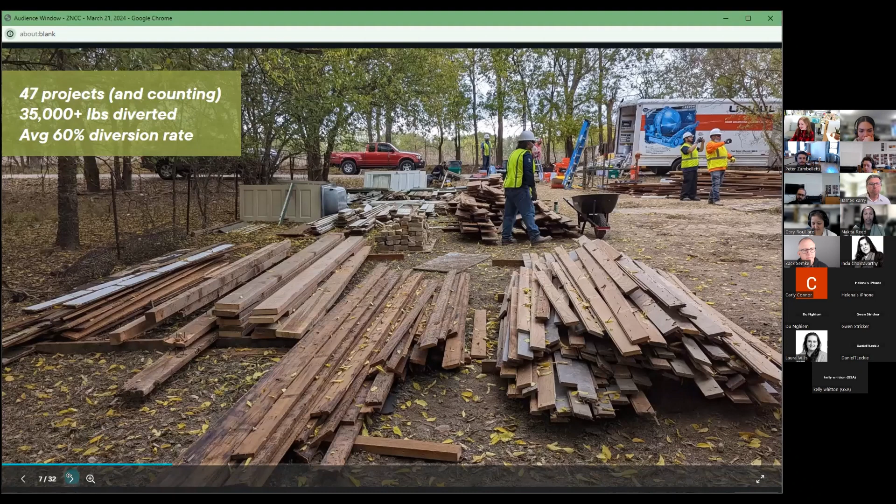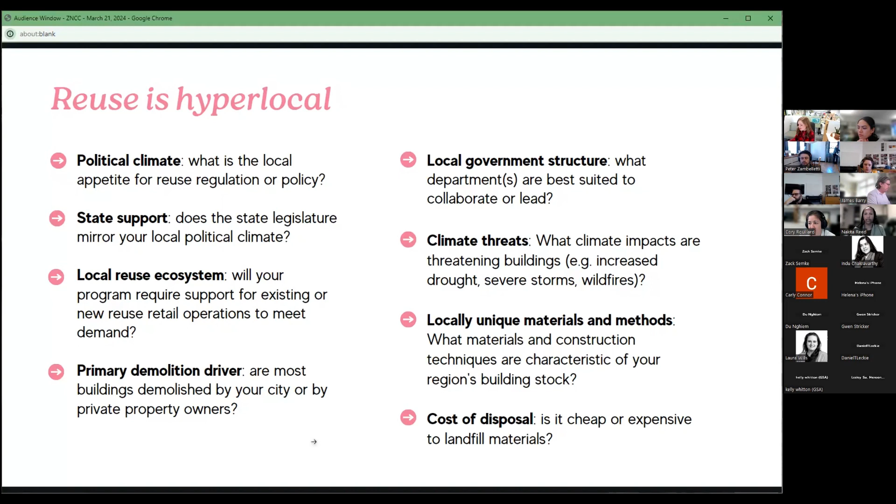So that comes into play when we're talking about how policies are crafted, because that identifies what kind of stakeholders need to be in the room when you're talking about how to move deconstruction forward. So hyperlocal is definitely key. And then we've kind of reflected on how we've gotten to the point of an actual regulation in a city like San Antonio.

Looking at how materials are flowing in our city, like how people can access reclaimed building materials - so looking at those considerations. And then of course, my favorite thing is developing interdisciplinary networks and partnerships, because for a policy like this to succeed anywhere, it can't just be one entity or one person doing that work, because in effect we are trying to challenge the overarching linear economy in our cities, which makes it really easy to throw things away.

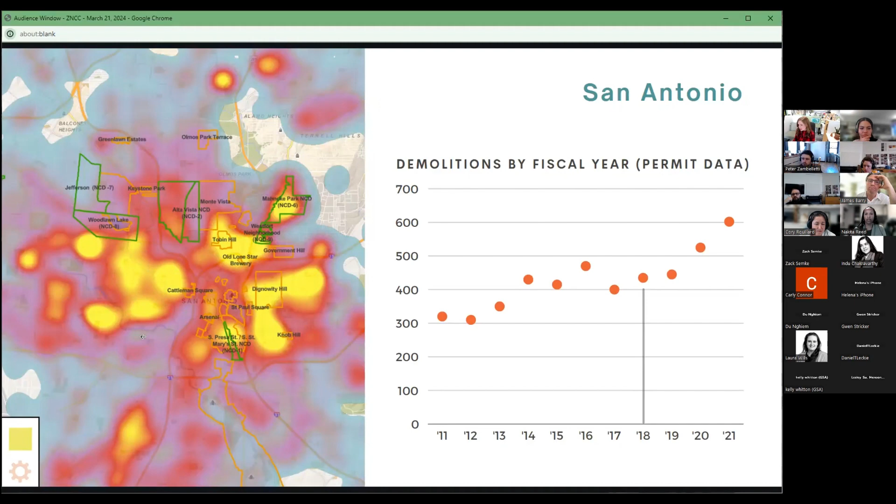Something we did before bringing the ordinance to a vote is we commissioned a study called Treasure in the Walls. It's at this link if anyone's interested in reading it. It looked at what a deconstruction policy would do for San Antonio economically, environmentally, culturally, socially. It was basically a strategic plan for deconstruction. And we wanted to put a dollar value to the amount of materials we were throwing away through this linear practice.

$16 million in the past decade. That's insane. So really getting to those people that are numbers-based and understanding that we're literally throwing away resources that could be used in our own city.

I mentioned how we're up to over 600 buildings demolished annually. Something really key with data is that we were able to illustrate this is a 70% increase since 2012, meaning that pace is exponential, and that we need to do something to curb the reality that we're throwing away things that are filling up our landfills and things that have value.

Something else really key to our city council was the public health implications of demolition. Demolition is effectively air pollution. Even if you're spraying down a site the way you're supposed to with water while smashing it, there's going to be particulate matter that spreads 200, 400, 600 feet away from a site. Demolition doesn't happen in a bubble, but it also percolates into our groundwater. It's just not a sustainable practice. And I look forward to the day when it's something people really look down on.

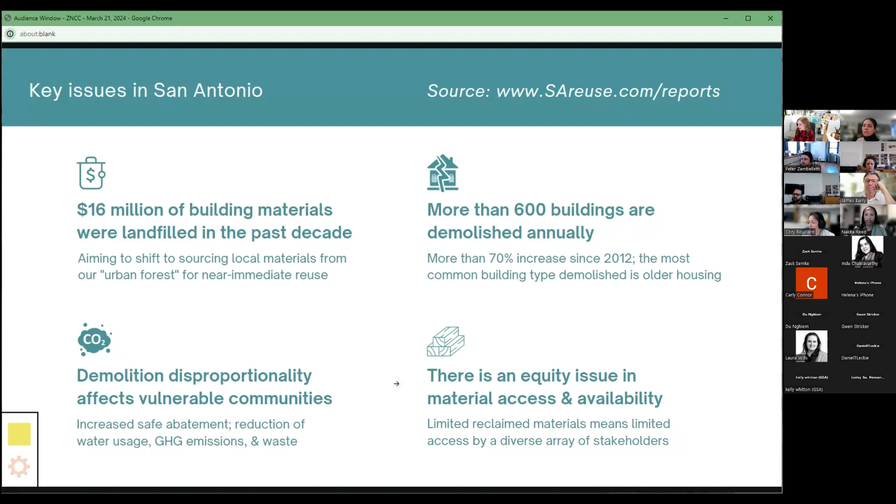Limited reclaimed materials means limited access by a diverse array of stakeholders. In a way, when we're throwing away building materials, we are robbing our own community members from being able to access those. And for what? For them to sit in a landfill and do nothing? Come on, that's crazy. We really wanted to focus on how, if we got more of these materials back into San Antonio, we could use them for a multitude of different purposes that are productive.

Something focused on preservation, we also really wanted to look to history to demonstrate that deconstruction isn't actually new or novel. Demolition is more new. The way that we know and experience demolition really wasn't a widespread thing until after World War II, which is when we brought war machines, machines of destruction, back from Europe to the United States for urban renewal. Before that, deconstruction was more prevalent, sometimes referred to as wrecking.

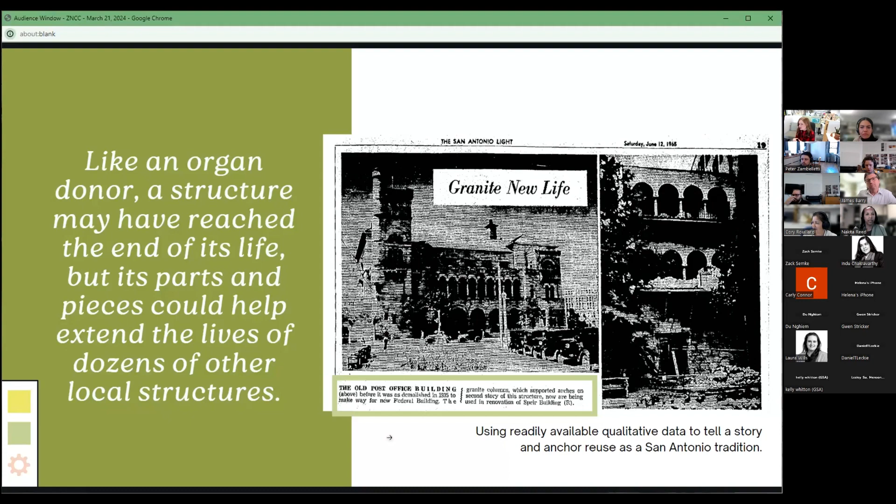And I love newspaper archives, they're my favorite research tool. This is just one example from San Antonio, where one of our older post office buildings, located right across from the Alamo, was deconstructed in the 1930s. Some of the granite columns and limestone block were used to repair a building on the famous San Antonio Riverwalk. So we like to point out that this isn't only a San Antonio tradition, but an American tradition, and it's something we can get back to if we have the will to do it.

Training a workforce, this is key. For any community that is looking to get started or dip their toes into what deconstruction can do, workforce training, I think, is a really great next step.

As the city, our first deconstruction contractor training that we hosted was in 2019. That was a year after we launched our advisory committee, but still years away from our actual ordinance being adopted, so you don't need a policy to pursue workforce training. We've held a training every year since, and as the city, we are committed to hosting it indefinitely.

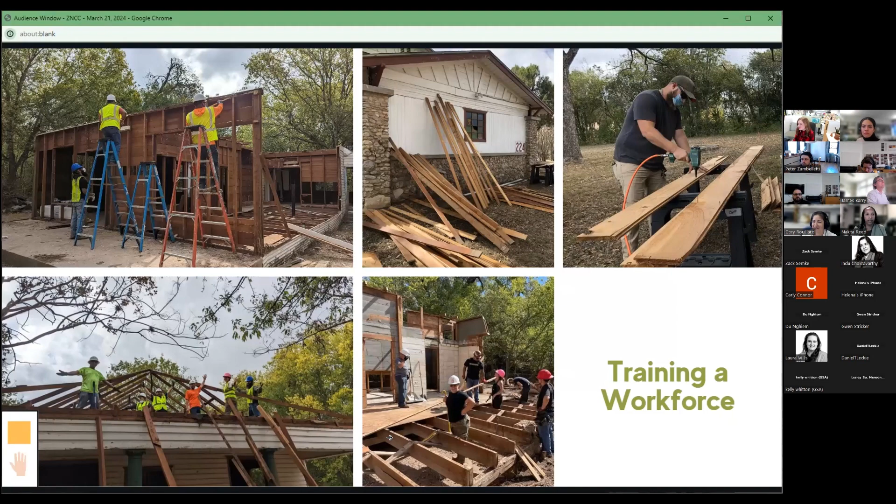We subsidize this training for contractors, and we work with an amazing all-women-led nonprofit out of Re:Purpose Savannah. We hire them to train our local contractors. And I have a fun video to show you that summarizes that program.

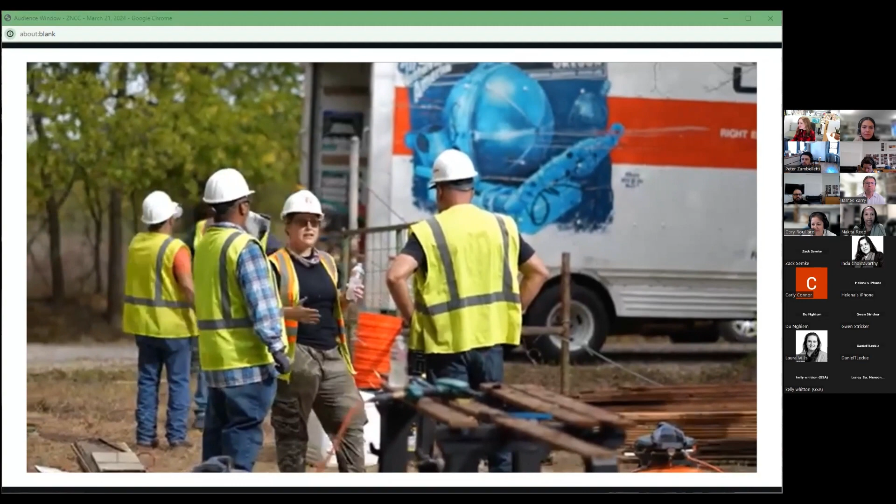We are here on a property on Fitzhugh Road, which is owned by the San Antonio River Authority. We are conducting a deconstruction training program in partnership between the Office of Historic Preservation and the San Antonio River Authority's property here. I think it's an awesome experience.

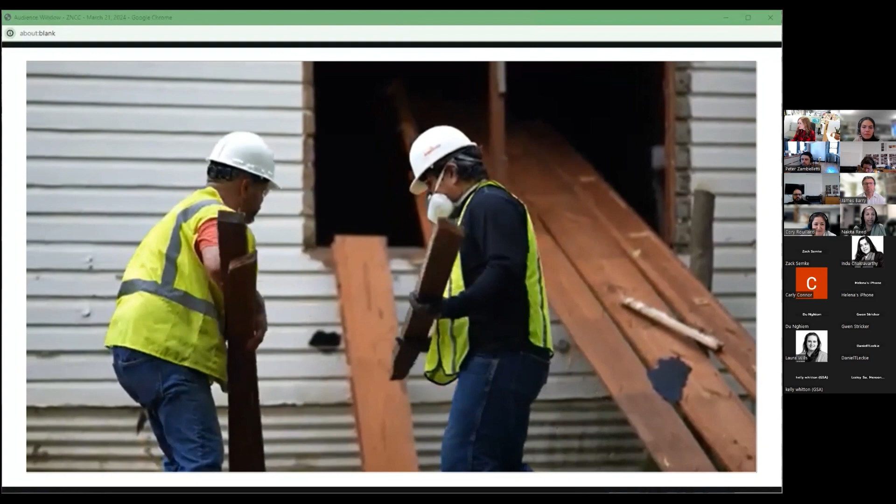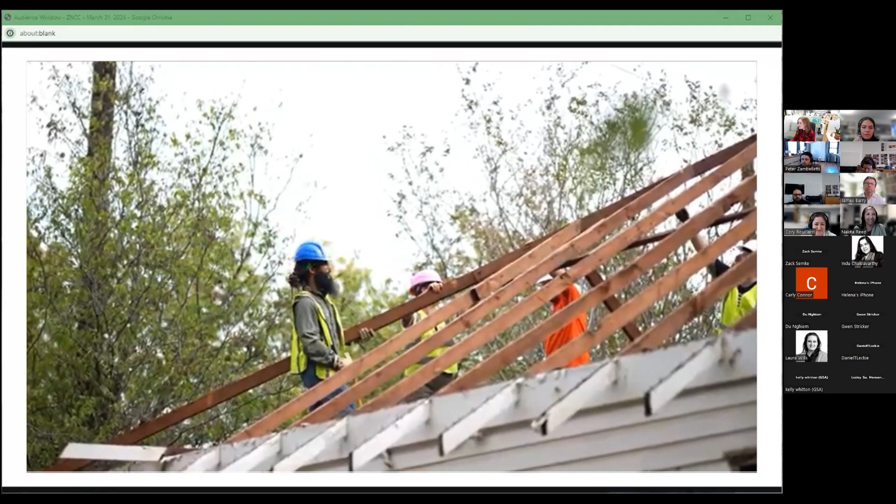I've learned a lot, as far as salvaging wood, it's going to be beneficial to us. The tools, the knowledge that they've been sharing with us, taking us out—I never imagined we could take a roof off from the attic out. When I got up there and started doing it, I was like, wow, okay. It's been a real experience. A lot of knowledge has been poured out, knowledge that we could take back and use for our stores and for anybody else out there that wants to do this kind of stuff.

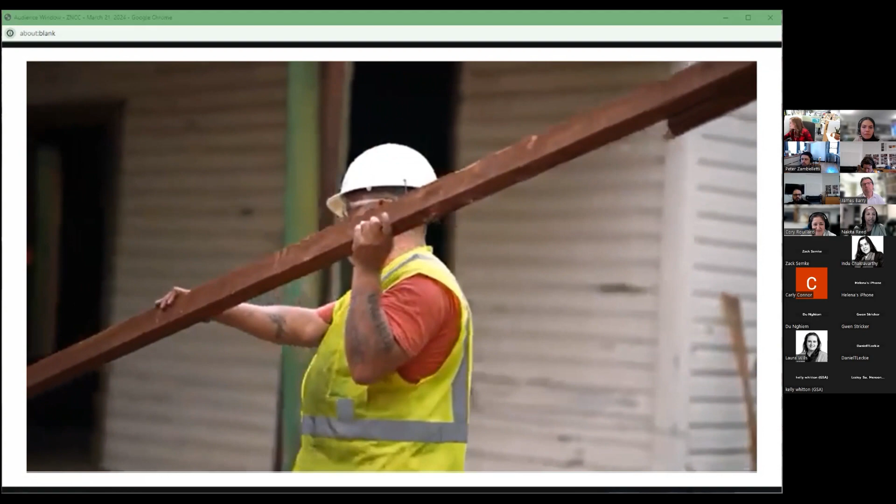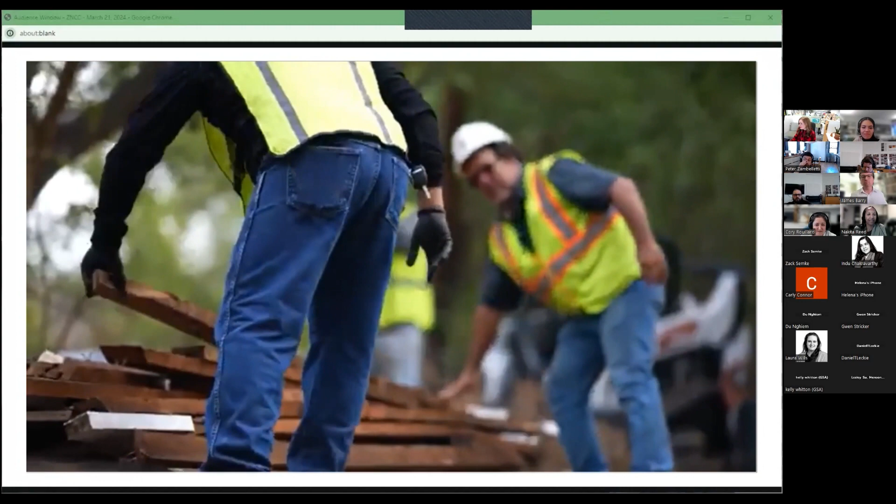I'm new at this, and just working with the material, it almost has a life of its own. Like when you're trying to pull a board off, it's almost like it doesn't want to leave home. But it has to, because otherwise it's going to go in a dumpster. We're also saving the environment by not having to cut down trees and throwing good material in the landfill.

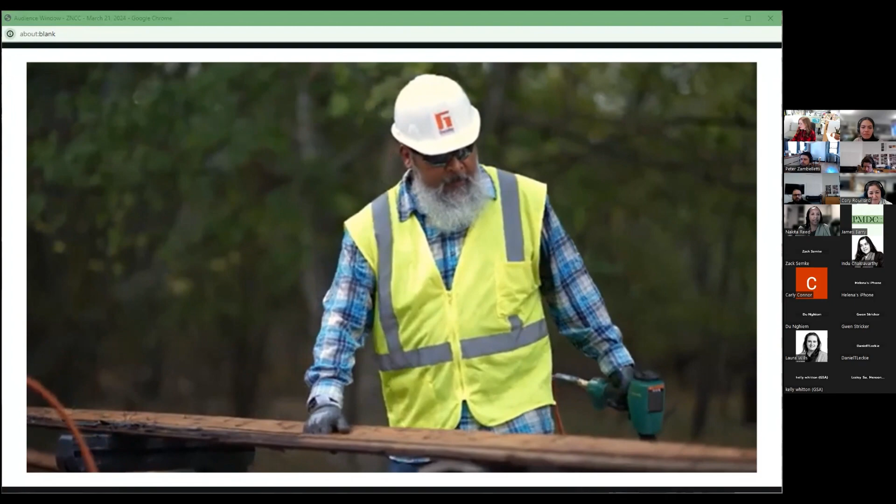What we see is that a portion of our materials is going right back into the buildings, and another portion is going into craft materials and home goods, things which will be cherished, a family table that you'll sit around for generations, heirloom items. These are really beautiful materials, and often they're best served by being accessible, touchable, visible.

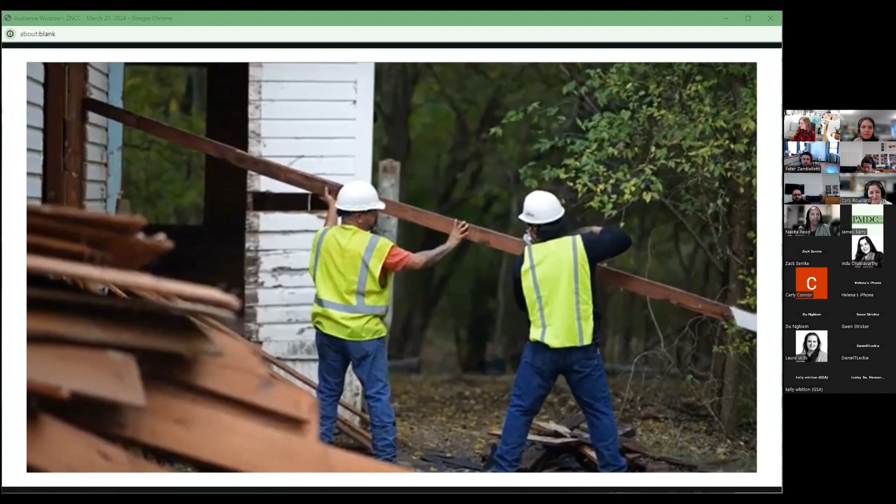For folks who are interested in getting involved, there's a million ways to do so, and you don't have to swing a hammer to get involved in deconstruction. We need people at every level, working in policy, advocacy, education, business. Get in touch with the OHP, your Office of Historic Preservation, which is going to be hosting many trainings just like this one.

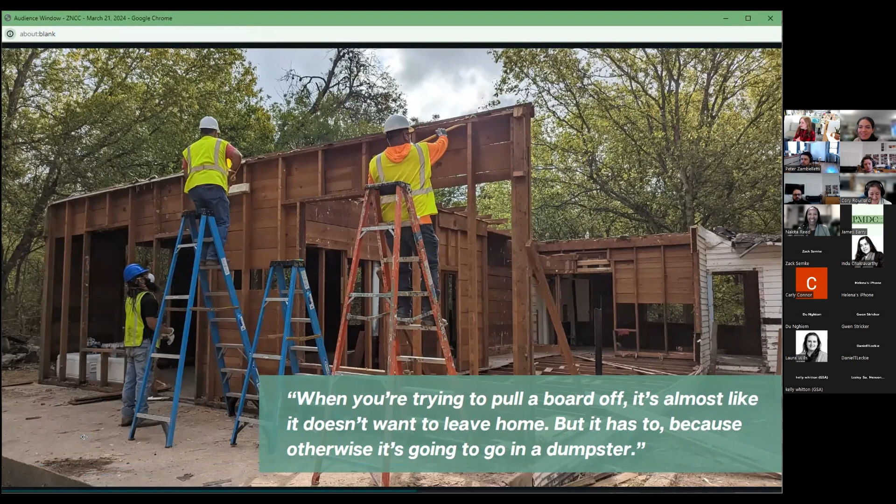I want to hone in on something that a trainee said, which is when you're trying to pull a board off, it's almost like it doesn't want to leave home, but it has to, because otherwise it's going to go into a dumpster. This quote gets me every time in the feels.

I think it really illustrates how deconstruction sits between the binary preservation field we've found ourselves in, where preservation is the win, demolition is the loss, and there's nothing in between. But in reality, there's a lot in between.

We're able to train our contractors through that preservation lens, so they understand the material history, the material value, the cultural value of the work they're doing. That's why we love working with Repurpose Savannah, because they approach deconstruction as a preservation tool.

In addition, we've always viewed deconstruction as an extension of our legacy trades. It's a legacy trade in the same way window restoration is a legacy trade, or architectural carpentry. And our foundation for getting deconstruction training going was that for over a decade, our office has been hosting community hands-on training workshops.

Workshops like window workshops over a weekend turn into something like Rehaborama, where we're restoring 20 houses in one day with 300 community members. From there, we established a trades academy, which is now a college alternative for people looking to enter the trades field, which is so in demand.

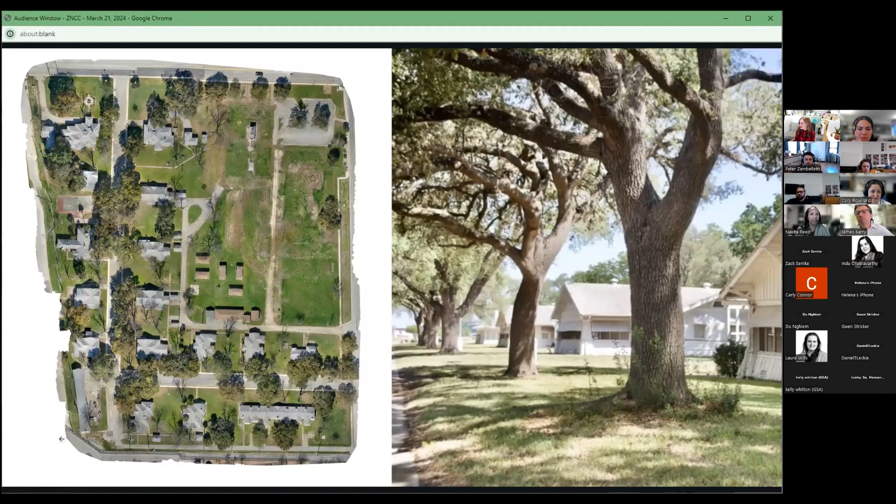It's now decommissioned, called Port San Antonio, but these gorgeous craftsman houses, these bungalows, were basically vacant for 20 years. Our office said, hey, we know what to do with these — can we use them for material storage, can we use them for trades education? The port said, yeah sure, why not. So this is our playground now.

The key components this site is currently functioning as: the Material Innovation Center is what we call the arm where people can donate building materials, and then we as the city, with our partners, find the next use for them.

The houses you saw, our Trades Academy is actually restoring them — they're using them as learning labs. They restore one and move down the street to fix up another. Right now we're working on standing up a tool library so people can access tools for free to repair their buildings, because shockingly, San Antonio doesn't have one.

It seems very natural for all these functions to be co-located in one spot, because they're all focused on advancing reuse, access to trades, access to tools, access to the knowledge and physical items needed to really retain our existing housing stock.

Back to this organ donor analogy that we'll say over and over again — this is my favorite function of this center in its early stages. We are actively receiving building materials, like in that picture inside one of our garages, and connecting them to affordable housing projects.

Something I'm really proud of, that our team is really proud of, is that we're working hand in hand with the city's housing department. They do HUD-funded housing restorations and housing rehabs for deeply affordable units.

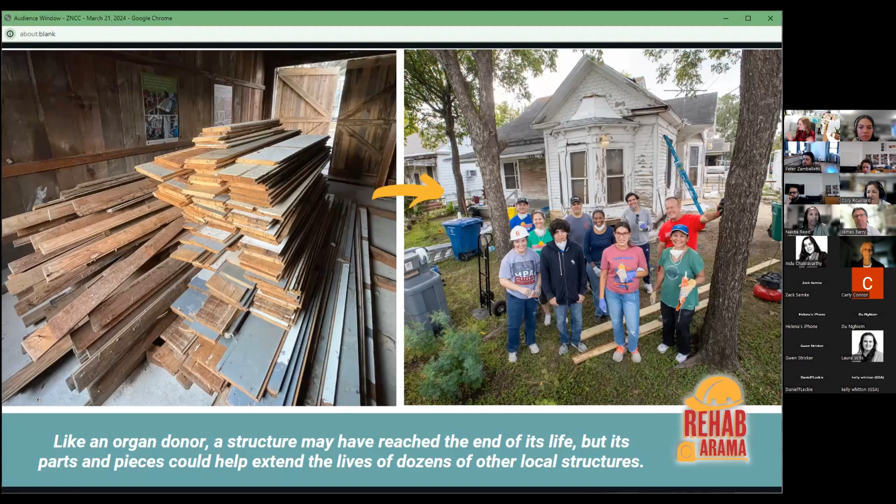Something else we're prototyping at this center - some of you may know the company called Rheaply, based out of Chicago. It's basically an asset exchange tool, a platform where you can upload excess materials and recirculate them within a confined community. Typically this is an organization, but we're actually piloting our own marketplace within the city itself, so all of the city's assets are being recirculated, like computers, mouses, desks, and furniture.

This is great, and something I could have never dreamed of graduating from a preservation program, working on something like this. But when we're in the thick of it, it just makes so much sense that we're connecting climate and housing to preservation and reuse.

Another fun thing happening at this campus - there are these really, really cute, basically ADUs that were moved from a different part of the base when it was closed to this site. We're actually looking at duplexes right now. We're really interested in connecting our work broadly into affordable housing. Much like many cities across the country, affordable housing is the top policy priority in San Antonio - the biggest priority of our mayor.

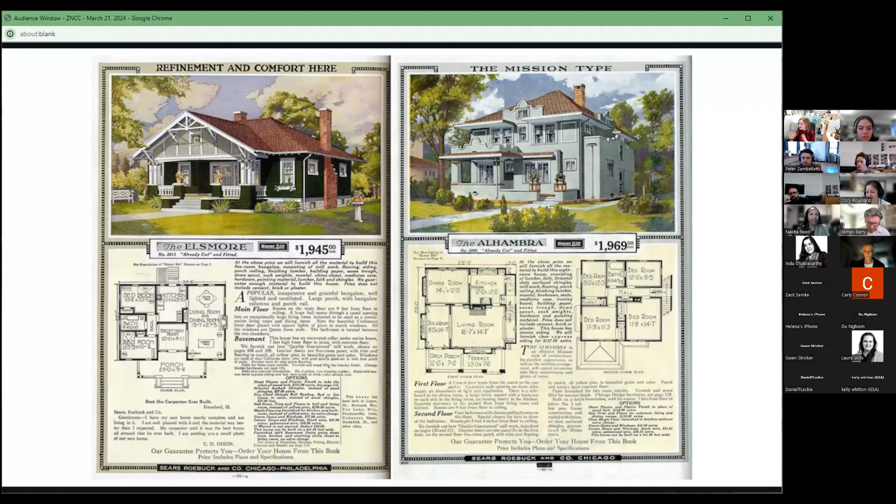So we like to go back to history, our favorite thing to do, and reflect on kit houses. I'm sure most if not all of you know what kit houses were - you used to be able to order houses from Sears or another organization and basically get prepared materials for someone to build it for you.

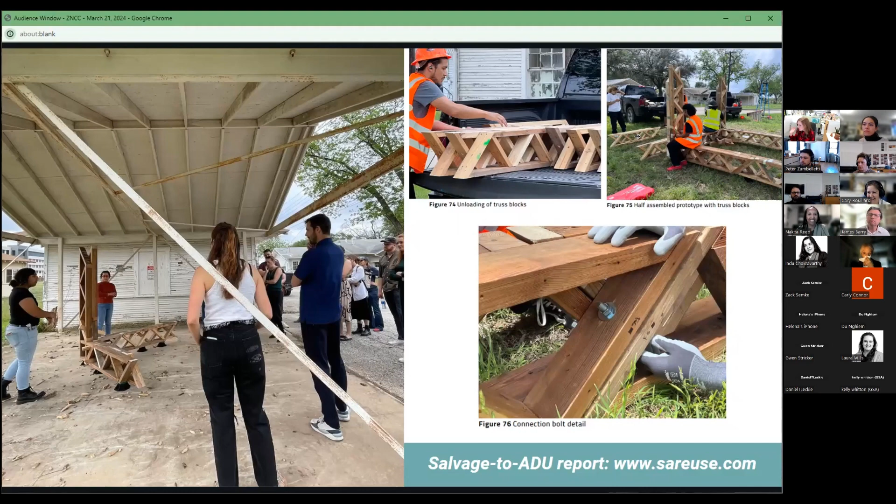So this is probably my favorite thing that has ever happened here, but I'm a very hyperbolic person. My next favorite thing will probably happen next week, but whatever.

Another really great example of what we refer to as community impact projects - this is a team from Lake Flato Architects, one of my favorite architecture firms here in San Antonio. There is an event held every year nationally called Parking Day, where a large thoroughfare in downtowns with vehicular access is closed for a full day and made pedestrian only. Organizations are invited to set up couches and little spots to demonstrate the power of pedestrian only traffic. Last year's theme was focused on sustainability.

So they constructed it, built it, used it, and then deconstructed it, and then donated all of those materials back to our center to be reused in another way.

What I love about this is that we're starting to expand our partnership into artists. We have a collective of artists from a Black-owned art gallery currently using materials from our center to design pieces for a Juneteenth event coming up in June. These are the kind of partnerships we want to prioritize, focused on things that can be used in parks and public art. This is a really great example of cradle to cradle: using materials from the center, designing and using them, and then donating them for another use right away.

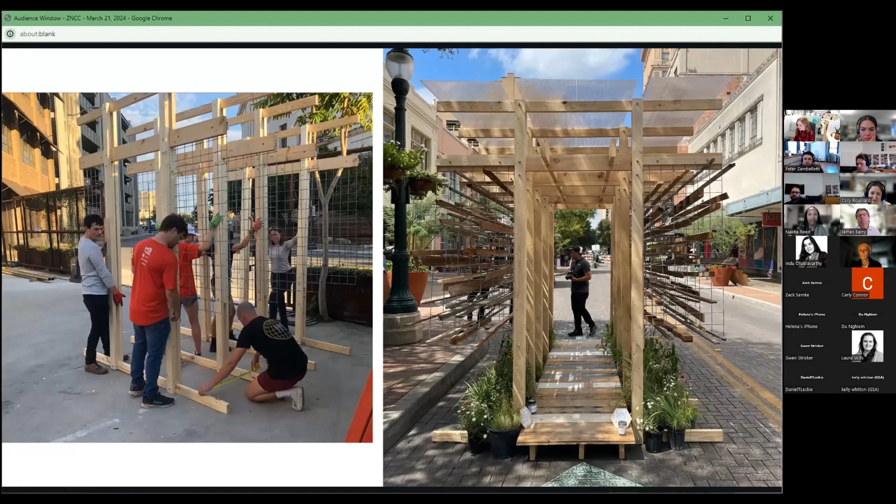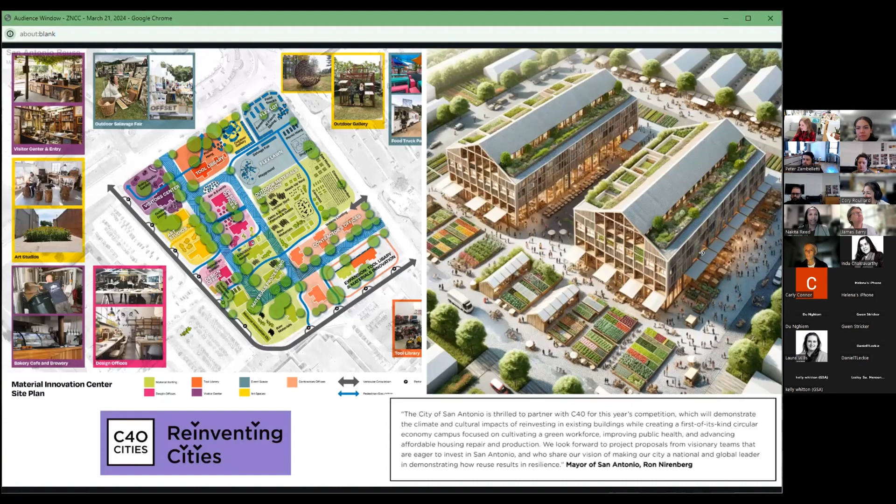So yeah, super exciting. We're moving fast, and we're really grateful that there are a lot of people in the design industry who can really see our vision and communicate that with other people.

That's really one of the big goals of our office - to help see this happen more and more across the country, because we're definitely stronger together.

I always say you can't build a community around the landfill. No one's like, let's go out to the landfill and hang out. No. But the exchange of building materials almost harkens back to the idea of going to your neighbor and asking for a cup of sugar.

One of my favorite things that we see with our deconstruction training, and really just deconstructions in general, is that it's very common for community members in these older districts to come up to the deconstruction contractor or the owner and say, hey, I would really like X amount of linear square feet of that siding to fix my own house because it matches mine, right? So those are kind of like the micro circular economies that we really want to see happen. And this is just like the start of that.